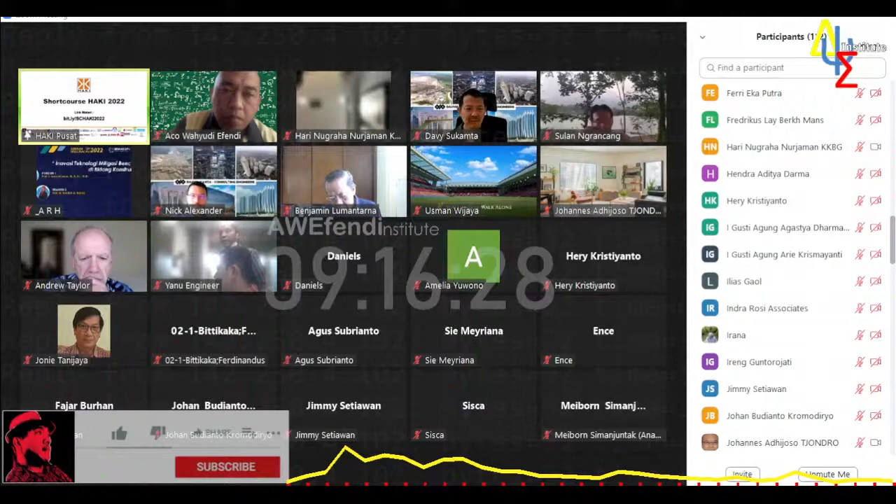Tanah air beta, pusaka abadi nan jaya. Indonesia sejak dulu kala selalu dipuja-puja bangsa. Di sana tempat lahir beta, dibuai dibesarkan bunda, tempat berlindung di hari tua sampai akhir menutup mata.

Okay, so thank you very much for inviting me. As I said, I will be speaking—let me back up. I will be speaking for a little over an hour, maybe 90 minutes, and then we'll have time for questions, so I will attempt to answer as many questions as I can.

The two main topics that I will talk about are the changes, as I mentioned, between ACI 2014 and ACI 2019. And then I'll be describing some of the changes, not all of them, because we're still working on it, for the 2025 building code.

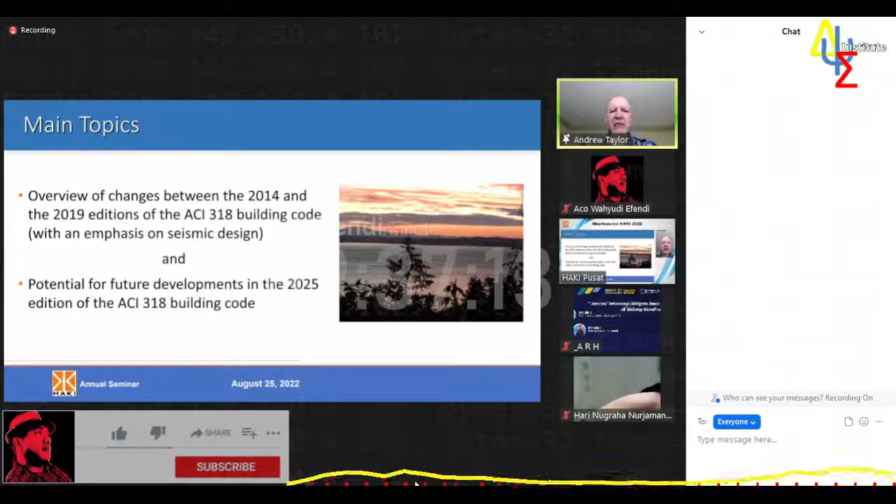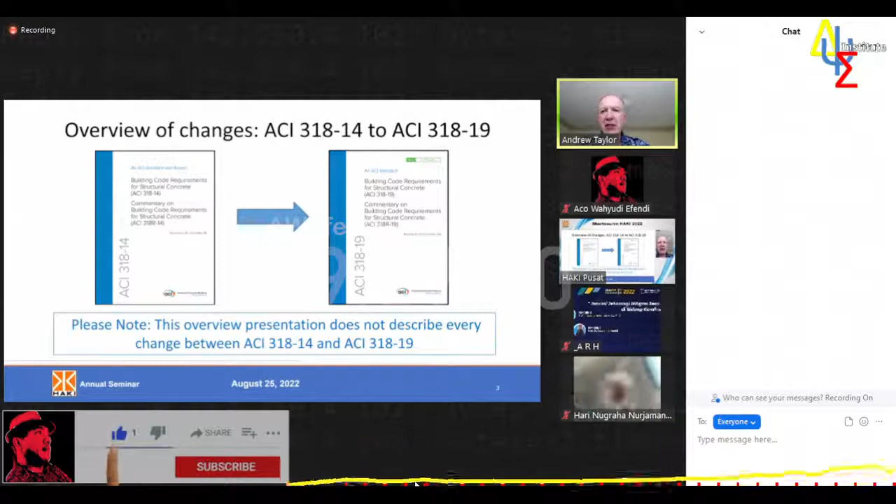I want to point out that in this presentation, there are a number of changes to ACI 318-14 to 19, but in this presentation, I will only cover the most important ones, the major ones, and I will let you know what these most important changes are. Normally, when I present about the changes between ACI 318-14 and 19, it is about a 6-hour presentation, so I've condensed that, and I'm going to cover the most important points today.

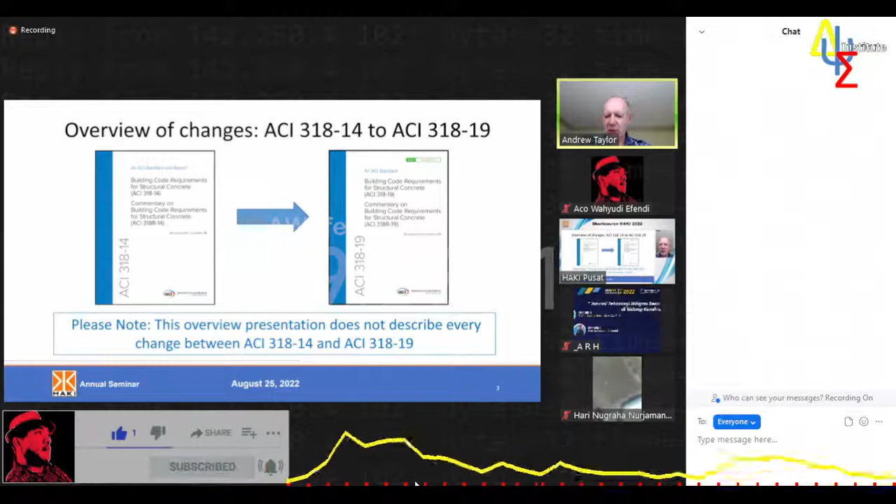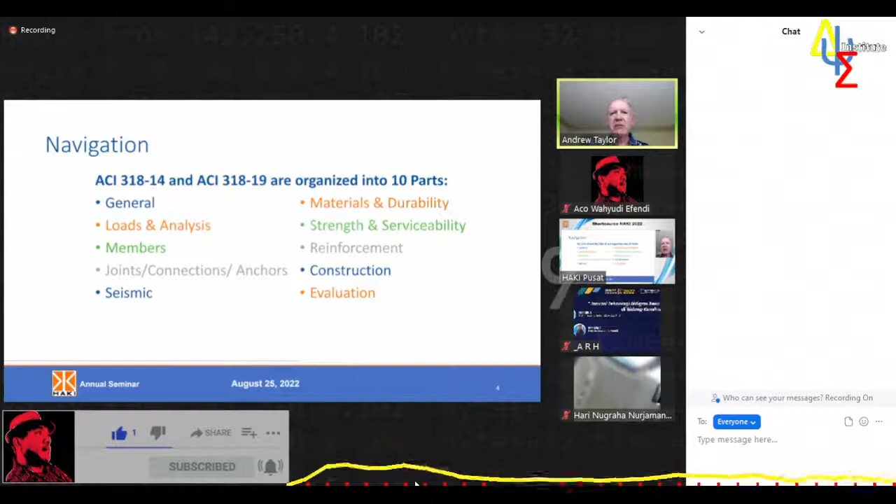I want to point out that since 2014, the ACI code has been organized into 10 sections, and you see them listed here. The first is general, which contains information on how the code is to be used and interpreted, and so on. Then loads and analysis, member strengths, joints and connections, seismic materials appears in a section, materials and durability, strength and serviceability, reinforcement, details, construction-related provisions, and evaluation of existing structures. This is just to give you a very large overview of how the code is organized.

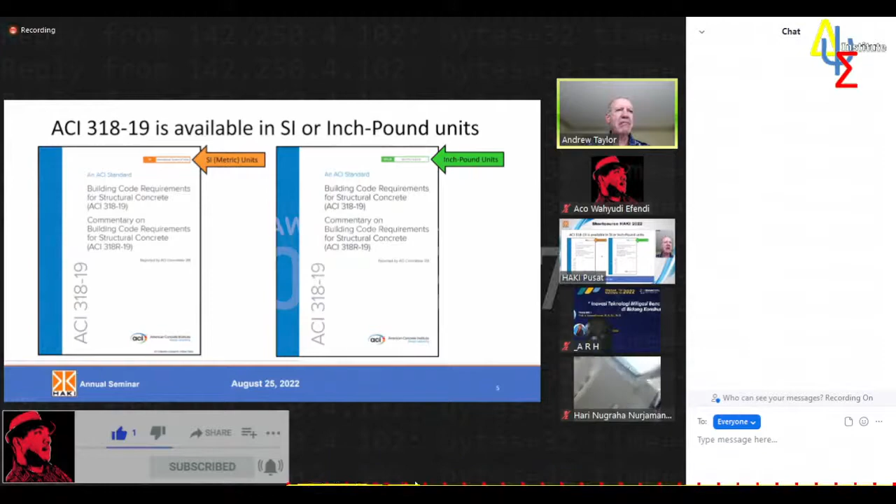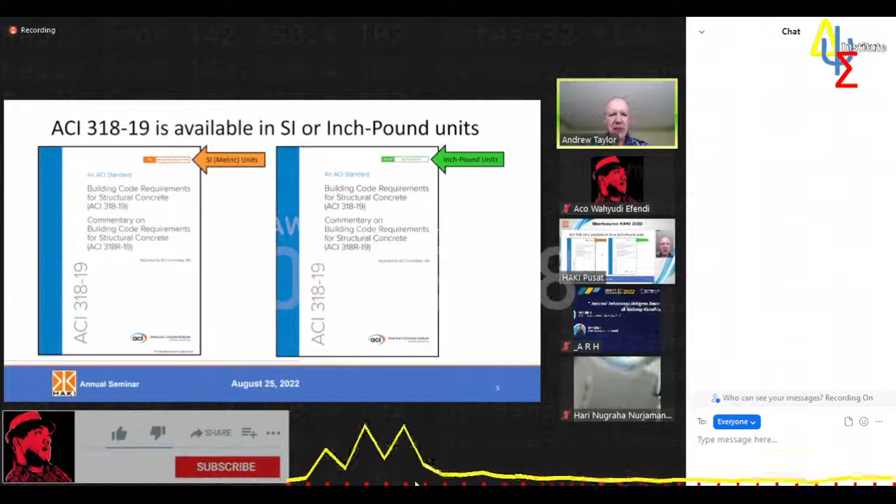Now, I want to point out also that there are several editions of the code available, including one in SI units, which is the one that I'm assuming that you would be using. The one on the right is the inch-pound units version, the one that I use most. You can see the difference shown in the upper right corner, inch-pound versus SI. There are also editions of the code in Spanish, Chinese, and I believe one or two other languages. But most importantly, the slides that I'm showing you today are mainly listed in the American units or inch-pound units.

I've attempted to translate those units into SI units at key points within this presentation. For instance, I've converted kilopounds per square inch, or KSI, into megapascals, I've converted forces into newtons, and so on. Hopefully you'll be able to follow along in familiar units. I've also listed, for your convenience, the conversion factors if you wish to convert anything from the inch-pound version to the SI version.

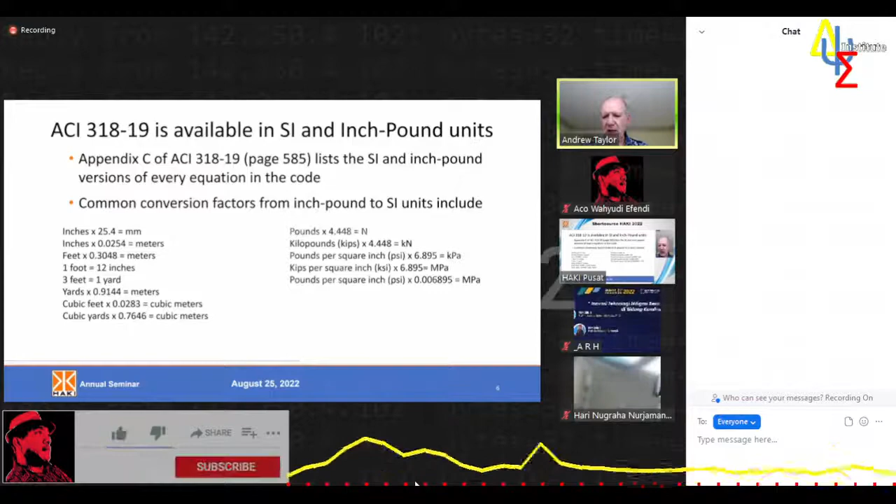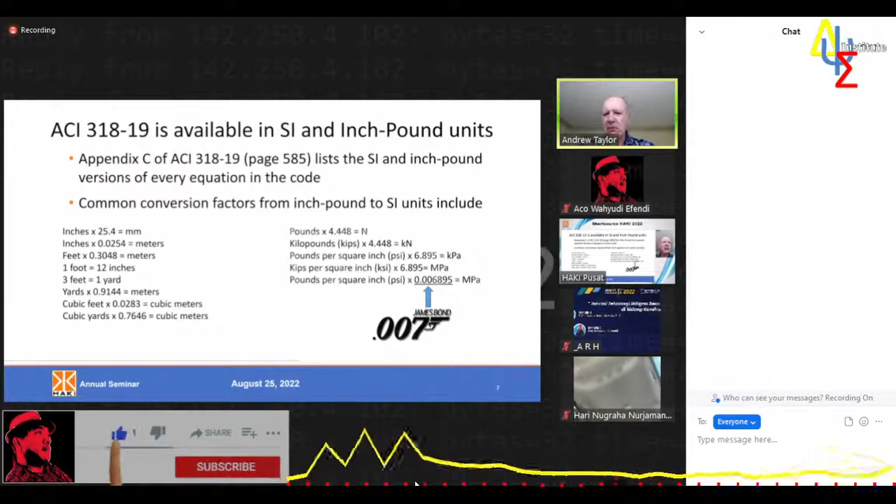One factor I find very interesting is the last one: pounds per square inch times 0.006895 equals megapascals. I wanted to note that's close to the famous number associated with secret agent James Bond, 0.007. So remember that number if you're ever converting from pounds per square inch to megapascals.

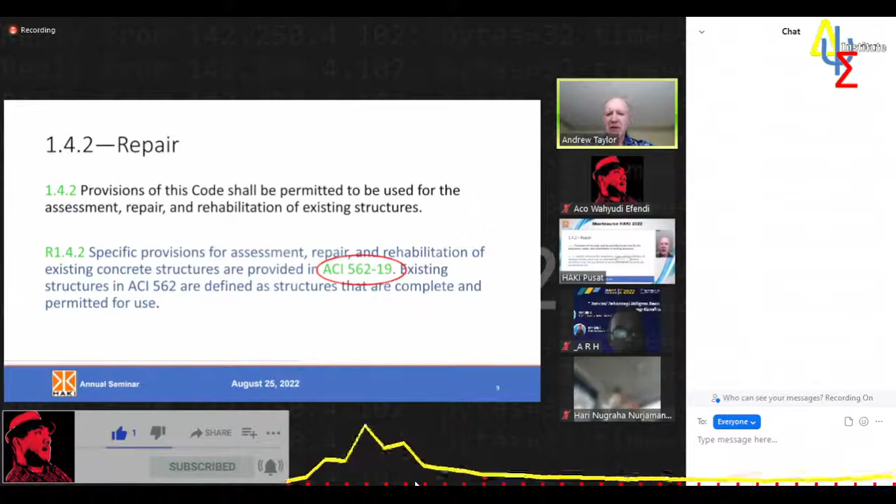All right, let's get started on the actual contents of the code. When it comes to repairing existing buildings, those that have been damaged or deteriorated, the code refers to the document ACI 562, which is a repair and rehabilitation code. It's a very comprehensive and helpful code, so if you're encountering a situation where you need to repair an existing structure, please refer to it. But we also say in ACI 318 that the provisions for new construction or new design can be used when repairing an existing structure. So if you're using ACI 562, you'll also refer back to ACI 318, which is what we're talking about today.

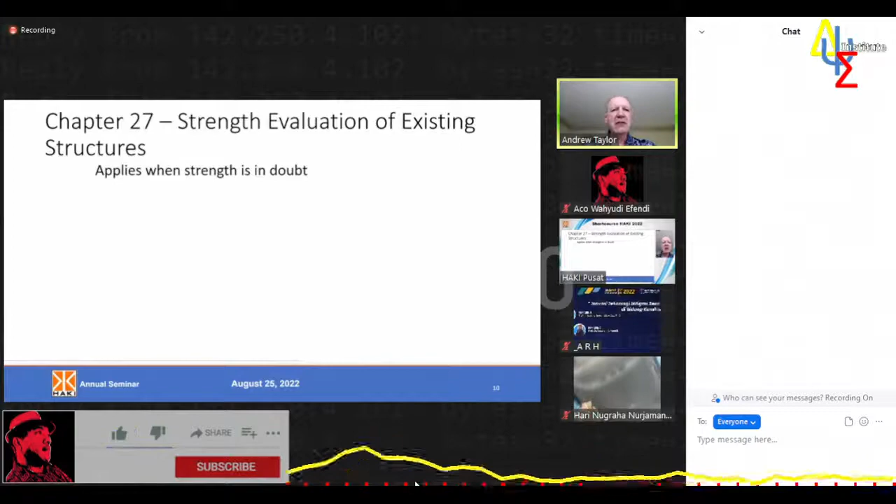So I'll skip way to the end of the code. The very last chapter is chapter 27, and its topic is the strength evaluation of existing structures. This applies when a structure is completed but hasn't been occupied yet. However, there may be some question about the strength of the structure, and this often happens if, for instance, a concrete strength test comes in too low. So it may be necessary in some cases to evaluate the strength of an existing structure in order to certify it for occupancy.

What is generally well understood by engineers is to look at the structure in question, if perhaps the concrete strength is lower than expected, and perform calculations to evaluate that structure. I think many of us understand how to do that and to see if the lower strength is perhaps acceptable. But what is not well understood generally is the procedure for actually performing a load test on the structure in the field. This load can be applied in a number of different ways: with heavy blocks, with tanks of water, with hydraulic jacks.

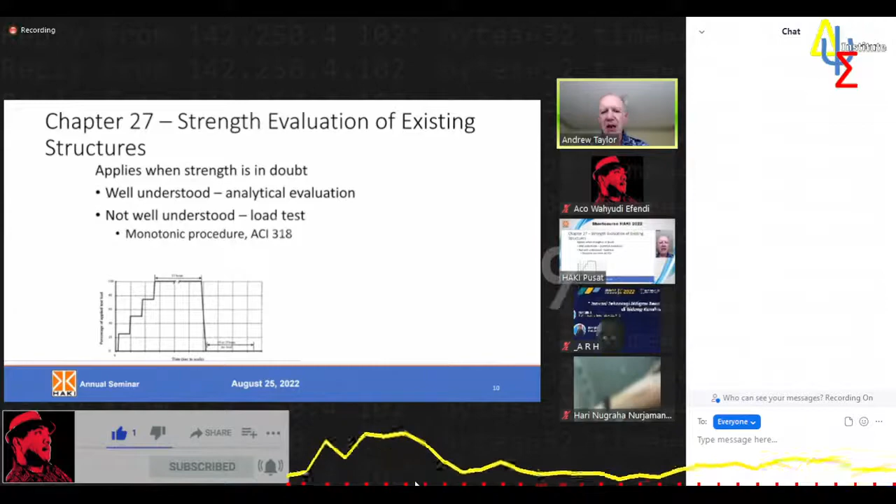There are two test procedures described in chapter 27. If you're encountering a situation where you need to actually test the strength of a structure, one procedure is called the monotonic test. It takes a long time because, as you can see in the lower graph, you have to apply the load and hold it for 24 hours, a full day, remove the load, and then evaluate the deflection after another 24 hours. So it takes at least 2 days to perform this test.

There's an alternative procedure called the cyclic procedure, presented in the document ACI 437.2. As you can see, the total time for one test is 120 minutes, or 2 hours, meaning this test can be performed much more quickly, and perhaps several tests can be performed at different locations in a structure if necessary. It's a cyclic load test where the load is increased and then decreased, increased again, and so on. I just want to make you aware of those testing procedures available in 318 and in ACI 437.

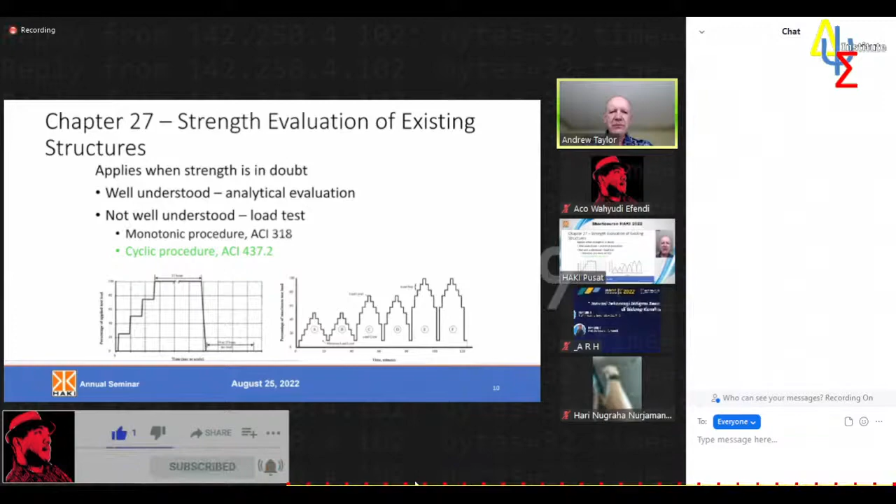All right, now we're going to go back to some of the more fundamental aspects of design that are covered in ACI 318. I want to point out something which is actually not new in the code, but it's very important, so I want to bring it up.

In previous years, previous editions of the ACI code, let's say ACI 318-08, the loads in that code were based on a US document called ASCE 7-05. In that code, the wind loads specified in ASCE 7-05 are not factored, meaning when one is creating the load combinations for design, you have to multiply the wind load from ASCE 7 by 1.6. So it's a factored load in that case.

Now, what has happened since then—and again, this is not new—is that in the last 3 editions of the ASCE 7 load document, that document has changed from service level loads to strength level loads. And the load factor used in load combinations is now 1.0.

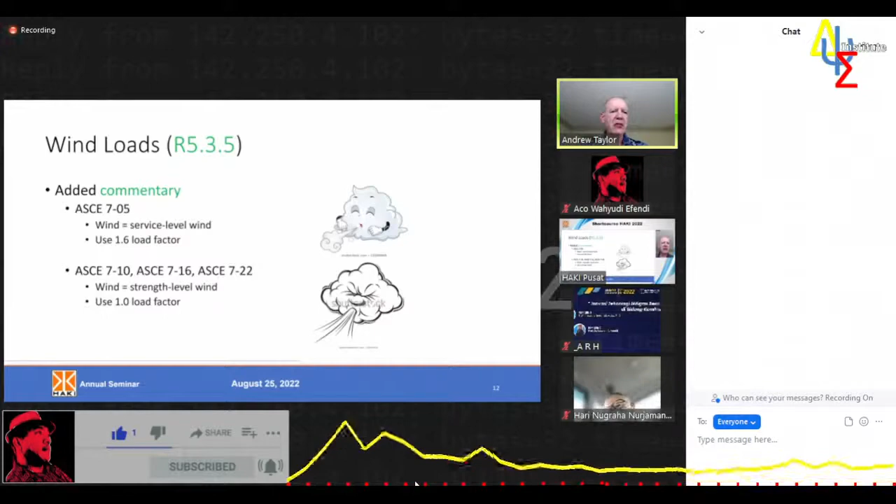So the wind loads as presented in ASCE 7 now are already factored. This is a very important distinction to be made aware of for wind loading, because the difference is a factor of 60% for wind loads. So if you follow current practice and use factored loads in your design, whether they're from ASCE 7 or some other document, as long as they are considered strength level wind loads, then the load combinations in ACI 318 are correct. Just a very important point about wind loading.

Another aspect of concrete design that I'm involved with quite a lot is the vibration of floors, either for sensitive occupancies like medical MRI machines or electron microscopes, or for human comfort, such as in apartment buildings, offices, and so on, where occasionally floor vibrations can be a problem.

Generally, concrete floors perform quite well from a vibration standpoint, and typically we don't have issues with them. However, there are cases, for instance long spans, very high precision machinery, or where there's a rhythmic loading, such as an exercise studio or vibrating machinery, and sometimes precast concrete elements can exhibit vibration that is not acceptable in a particular situation. So in the commentary to ACI 318, there are references for procedures and methods that can be used to evaluate floor vibrations. I want to point that out because occasionally that is something that just about every consulting engineer needs to deal with.

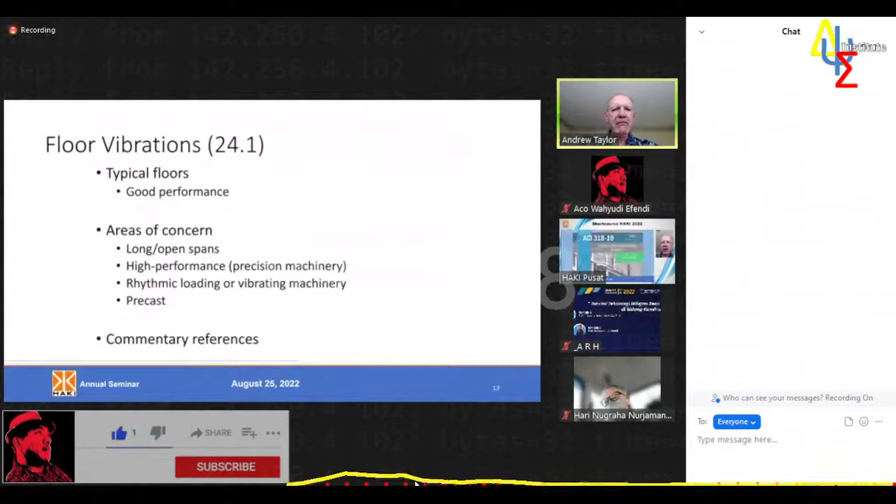All right, now we're going to talk about types of members, meaning slabs, beams, walls, and so on. The first type of member we're going to talk about is one-way slabs. These are slabs that flex in one direction rather than in two directions, and of course they're the simplest type of slab.

With this type of slab, the one-way bending slab, we are concerned with all structural systems, but in particular this one, about the potential for collapse under extreme loads that we don't even consider in our design. What we would like to do is preserve the structural integrity of these elements, these slabs in particular, so that they will remain in place. They may be severely damaged, but they will have a good chance of not collapsing. Because as we know, collapse of one element in a structure causes loads on adjacent elements. So we want to preserve this structure in its original configuration, even though it may be severely damaged.

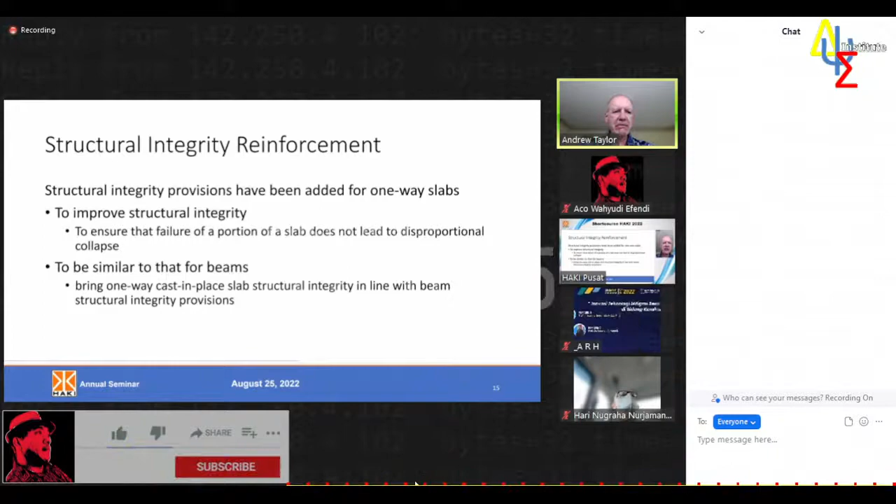So there are new provisions in the ACI 318 code to provide very minimal, inexpensive, continuous reinforcement in one-way slabs, to provide a high degree of confidence that they will remain in place if they're subjected to some very extreme loading that wasn't anticipated in the original design loads. So that's what's new about one-way slabs. Not much has changed, except that there's those new provisions for integrity reinforcement.

Regarding two-way slabs, you may be interested to see that two of the methods that have been in the code for a very long time, maybe 50 to 80 years, the direct design method and the equivalent frame method from 318.14, have been removed. Now this is not because there's anything wrong with those methods. Those methods are completely valid. It's just that they are not used very often. Most of the time they're used primarily for preliminary sizing, but not for final design. And we looked at those, and we are trying to save paper when we print the code.

So what we did was we took those methods out, but we left references in the code that said, for instance in section 8.2.1, the direct design method or the equivalent frame method, which have been removed, are valid. You just have to refer back to ACI 318.14 for the rules about how to use them. They aren't eliminated, they're just not printed in the current edition of the code, because we found that in practice they actually weren't being used very often, but there's nothing wrong with those. That same provision appears in section 6.2.4.1. So those methods are still available.

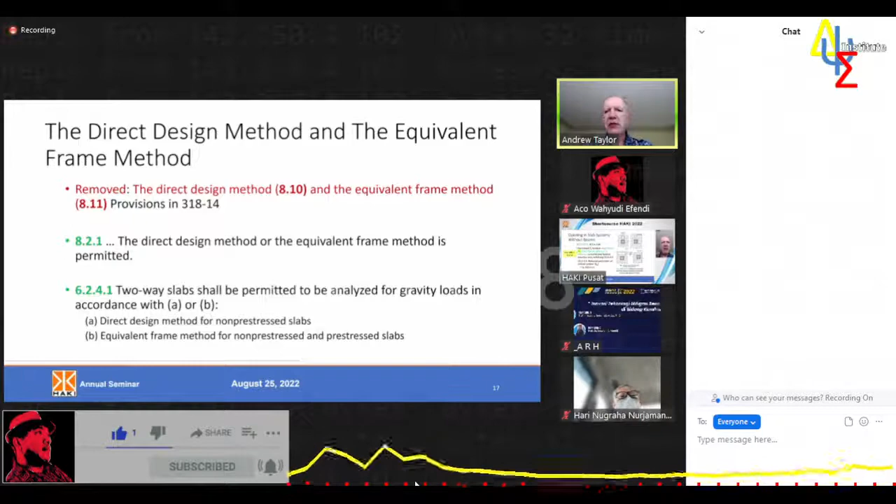Here's a very important one, especially if you're doing commercial design of multi-story buildings. We all know that the mechanical engineers want to put holes at the worst possible locations in the structures that we design.

That is right next to columns. They want to put holes through the slabs where pipes and conduits come down the columns. There are rules in ACI 318 about how to evaluate the punching shear strength of a slab intersecting a column. A very common form of construction is flat slabs without any drop panels or shear caps, just a flat slab intersecting a column.

A big change is that it was determined that previously in 318-14, the distance from the column that an opening may be located without affecting the punching shear strength of the column was 10 times H, where H is the thickness of the slab. That created more situations where it was harder to design for openings like those shown on the right.

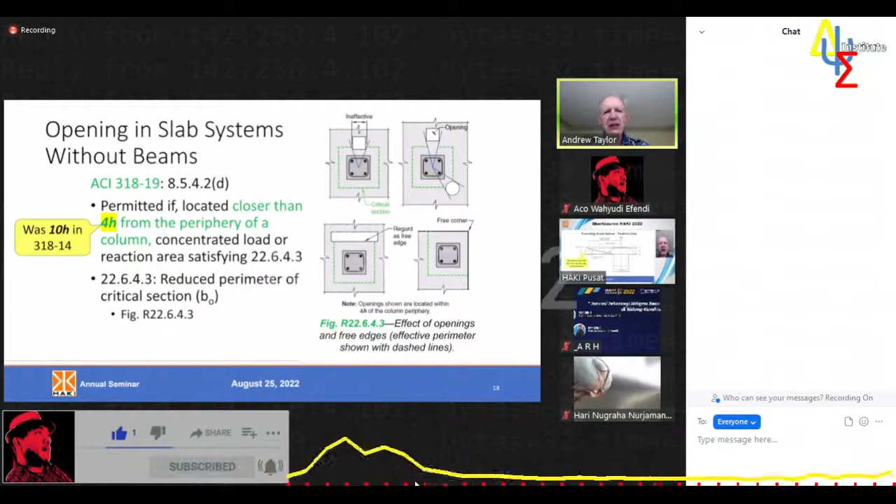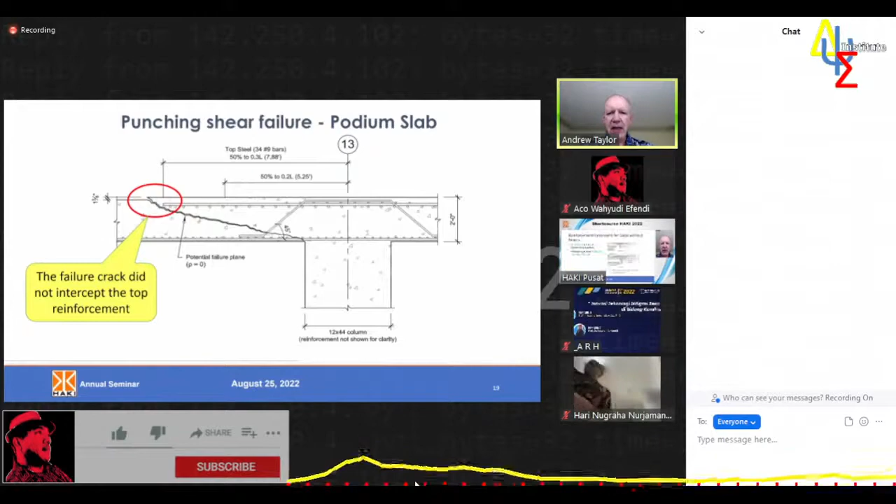D is the distance from the surface to the centroid of the tension reinforcement. So this is a new rule. If you're dealing with a very thick slab and you're concerned about punching shear, make sure that you evaluate the extension of those bars and that they meet the 5D extension rule.

Notice one thing that's very important: that extension is measured from the face of the column, not from the center line of the column. It's easy for the steel reinforcement supplier to mistakenly provide bars where the length or extension is measured from the center of the column, but it's from the face of the column that that extension is required.

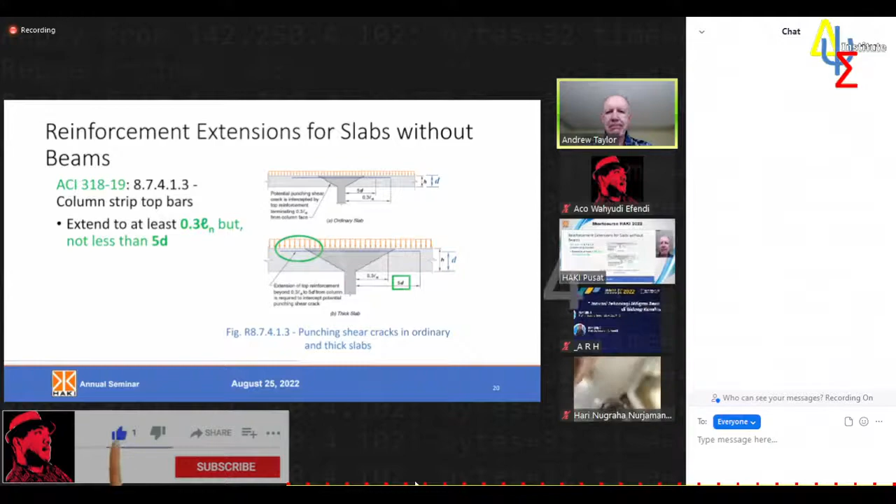Okay, now post-tensioning. This is a method that is widely used, particularly in the Western United States, not as much in the Eastern US. I'm sure that in your career you will encounter it - you may commonly work with it, or it may be less common in the kind of work you do. But there are a few changes here.

There is a new requirement for the spacing of non-pre-stressed reinforcement - the normal deformed bars in the slab. That spacing, not the spacing of the post-tensioning tendon but of the normal deformed reinforcement, has been reduced and is now the same as it is for non-pre-stressed or normally reinforced slabs. So things have been simplified a bit: the maximum spacing of deformed bars in pre-stressed slabs is now the same as for non-pre-stressed slabs.

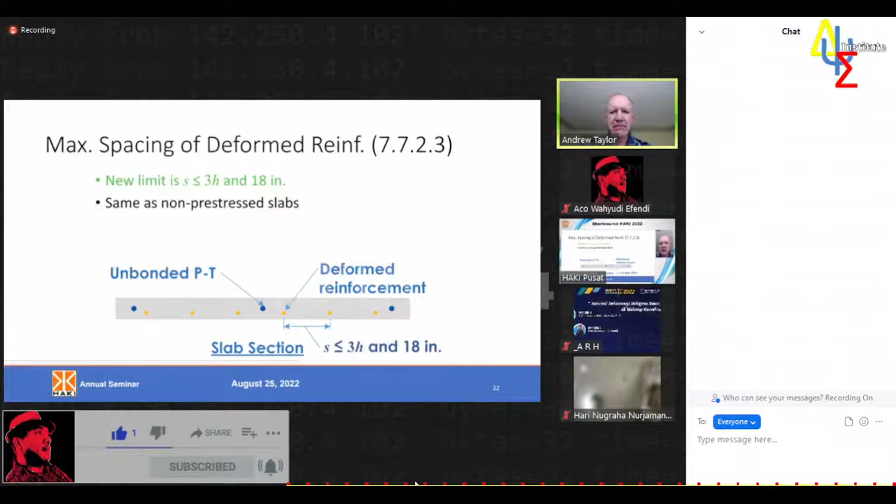Why are we requiring these bars? It's been found that the slab can split under the pressure or force of the post-tensioning tendons if there's insufficient reinforcement to inhibit this splitting and bursting of the edge of the slab. So these are new rules - if you're involved with this kind of construction, I would recommend that you review the rules for these backup bars, anchor bars, and hairpin bars.

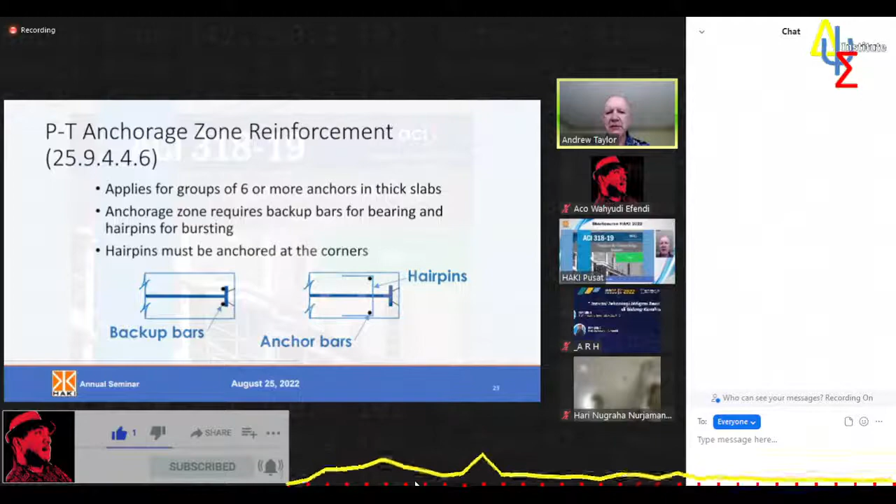Okay, now walls. What I'll be talking about here are not seismic shear walls, but non-seismic walls.

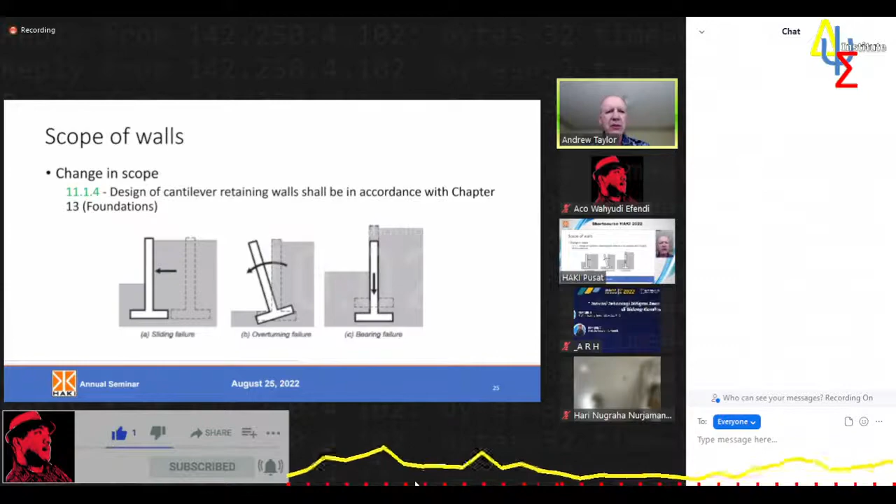There are a few changes. One of them is that cantilever retaining walls, with their illustrations of loads on cantilevered earth retaining walls, are now moved into chapter 13, or designed according to chapter 13. You might wonder why. They're walls, they were in the wall chapter, chapter 11, and now they've been referred to chapter 13, foundations.

What we found is that in 318-14, there was some confusion about the reinforcement of retaining walls. Specifically, there were rules about a portion of the reinforcement that had to be on one face of the wall and the portion that had to be on the other. They weren't very clear, they weren't very well understood. The definition of interior face and exterior face was not very clear, and we found there really was not a strong technical basis for the 1/2, 2/3 rule.

So now the rule is that there are 2 layers of bars near each face. It doesn't specify what the proportions are, as long as the calculations work for strength. There's one exception where that's not required: for walls greater than 10 inches thick, about 250 millimeters, for single-story basement walls. Generally these are found, at least in the US, in residences, one story below ground. Those do not require 2 layers of reinforcement, but all other walls greater than 250 millimeters require 2 layers of reinforcement.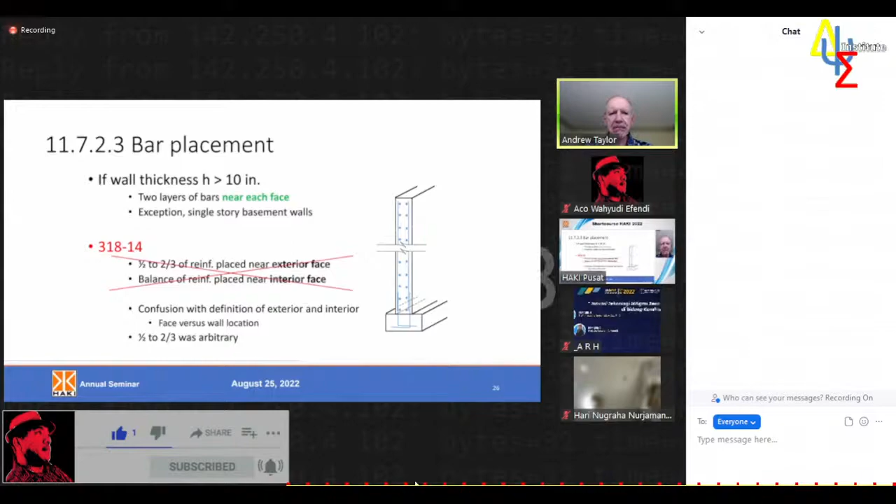Now let's talk about foundations. There are some really significant changes about foundations that I want to go over. As I mentioned, we moved the cantilever retaining wall provisions, or design rules, into the foundations chapter, and there have been many changes in the sections on the design of deep foundations. So what are deep foundations? Those are piles, drilled piers, drilled shafts, cased shafts, both cast-in-place and driven piles. They're all the types of foundations used in soft soil conditions. I'll describe why those have changed in a moment.

I also want to note that there have been small changes in the minimum concrete strength required for different types of foundations, and also a change in the concrete cover requirement, meaning the thickness of concrete covering the reinforcement.

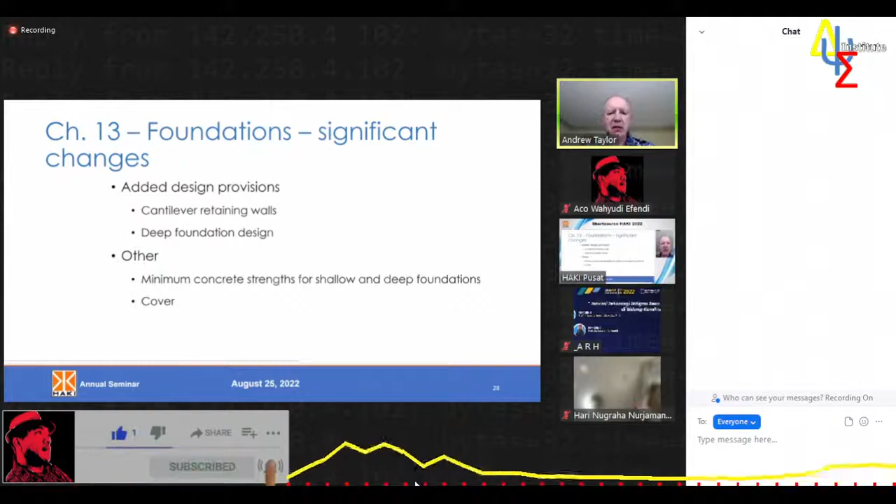So first of all, cantilever retaining walls. In 2014, the code described cantilever retaining walls as walls, and that they should be designed as walls. In 2019, we had a philosophical change so that these cantilever retaining walls are actually designed according to the rules for a concrete slab. We believe they perform better, are more economical, and it makes more sense to design them according to the rules for concrete slabs rather than walls.

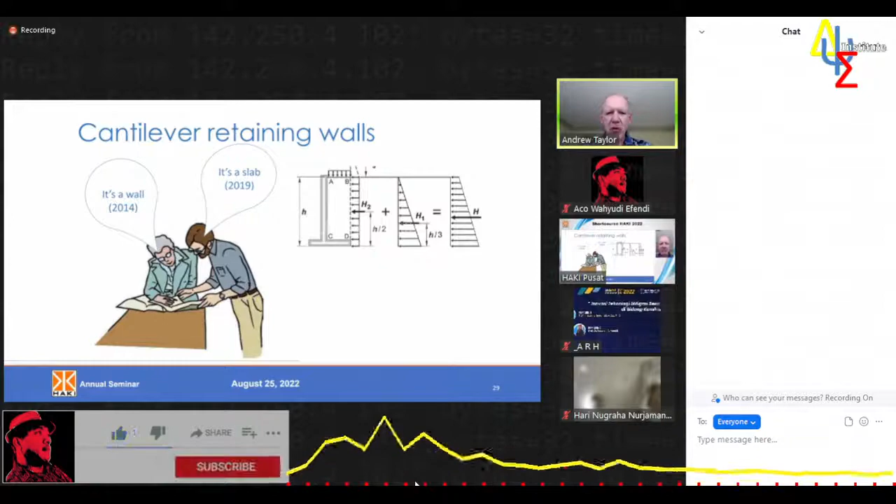I won't go into all the details, but if you look on this chart, you'll see that if we design cantilever retaining walls as a slab, as a one-way slab, then the rules for design get much simpler. In general, that results in a more economical design because it's a little more reinforcement, but it's the same in both the vertical and horizontal directions, so it's much easier to put into place. It also avoids mistakes in the field of having the wrong reinforcement placed vertically versus horizontally; they're the same. This chart outlines the differences between 318-14 and 19, and if you're interested you can refer to the sections shown there. I think you'll find it's an improvement over the last edition of the code.

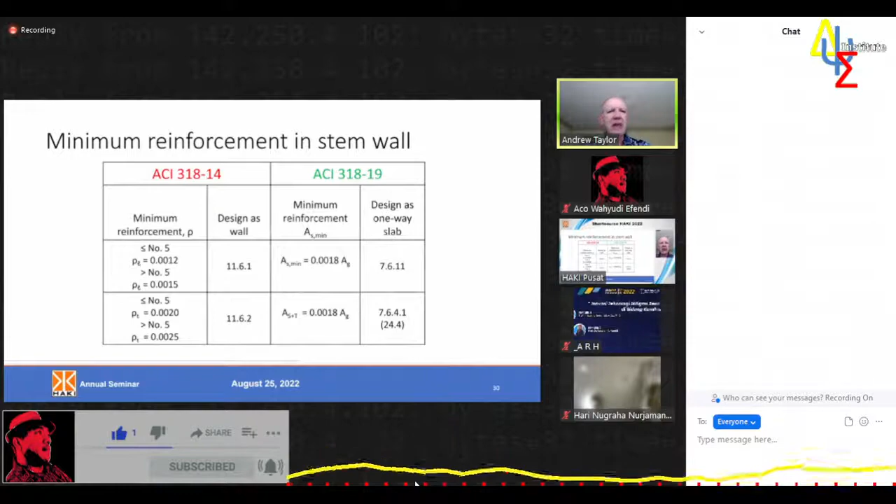Now, regarding deep foundations, I said I would explain why there have been changes in all these different types of foundation provisions. The ACI code mainly addresses deep foundation design for earthquake-resistant structures.

In the US, earthquake-resistant structures are designed according to a seismic design category, SDC, with category A being virtually no earthquake considerations for design, and categories D, E, and F being the most severe earthquake conditions for design.

ACI 318 addresses deep foundation design for seismic conditions in the higher seismic zones, design categories C, D, E, and F. It's a subset of the overall requirements for designing deep foundations, but a very important set of conditions.

Now, the situation that existed and still exists to some extent in the US is that there are rules for designing deep foundations in the ASCE 7 code, which is mainly a code about loads. There are different and sometimes conflicting rules in the International Building Code, which is the main governing building code in the US. And there are other, sometimes different and sometimes conflicting or inconsistent rules in ACI 318.

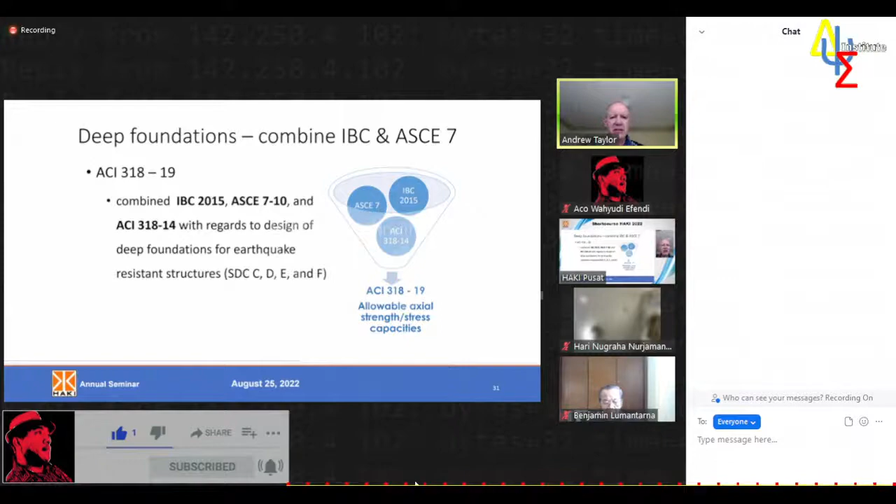Okay, anchorage to concrete is everyone's favorite subject. When we reorganized the ACI code in 2014, it was a major reorganization.

We reorganized all of the chapters except for the chapter on anchorage to concrete, which is chapter 17. So we decided to leave that alone because there had been some major changes in the previous edition, and we didn't want to go and change it again. But when it came to the 2019 edition, we worked on reorganizing chapter 17 so that it looked similar to other chapters that had been reorganized in 2014. So it looks different. The provisions are generally the same.

There haven't been major changes in the anchorage to concrete provisions, but we did add two more types of anchors, which I think are very interesting. One of those is screw anchors. These are anchors where you drill a dry hole and then install the anchor, which has steel threads that cut into the concrete. You're probably familiar with these, but this is what is meant by screw anchors. They're a very useful kind of anchor, fairly easy to install. I like them a lot. They may not work as well in corrosive conditions, but for protected conditions, they're nice.

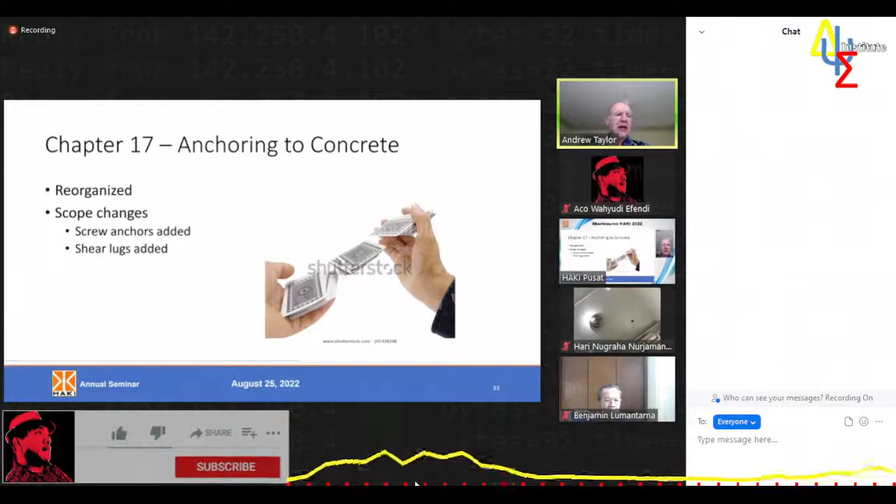And then we added something on shear lugs. So what are shear lugs? On the left here, you see a screw anchor, post-installed. A hole is drilled, and it's inserted with an impact driving wrench. Shear lugs are the steel projections beneath base plates that project into the concrete foundation and provide additional shear capacity beyond the shear V there, beyond what could be provided by the dowel action of the anchor bolts, the four anchor bolts shown in the lower diagram. And in the upper right, you see one of these shear lug configurations.

A lot of testing has been done on shear lugs. We didn't really know what their shear capacity was until fairly recently, at least not reliably enough to predict that. So now there are rules in ACI 318 about how to design shear lugs. We've gained more confidence in how to design and what the shear capacity of column base plates with shear lugs are.

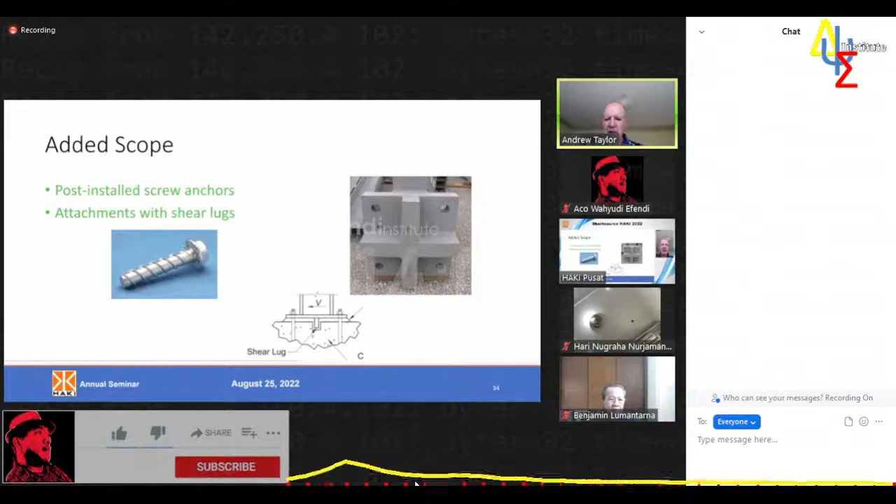Okay, now seismic, a very important topic. I have been involved in seismic design for more than 30 years now, and it never gets old. It's always changing. There's always new things to discover.

In the 318-19 code, we have made some changes in the seismic design provisions. If you would like a complete and very detailed tour of all these seismic updates, I suggest finding two articles in Concrete International, published last year in March and April. S.K. Ghosh and I wrote those together. They cover just about every detailed aspect of the changes to seismic design that occurred in the 2019 code. I invite you to look at those, but I'm going to point out some of the changes that are most important in this presentation.

Perhaps one of the biggest and most important changes is that higher strength reinforcement is now permitted in seismic design. Previously, grade 60 reinforcement, which is 420 megapascal reinforcement, was permitted for ductile seismic design, for flexural elements, and for shear. Now, 550 megapascal and even 690 megapascal reinforcement is permitted under certain conditions in seismic systems.

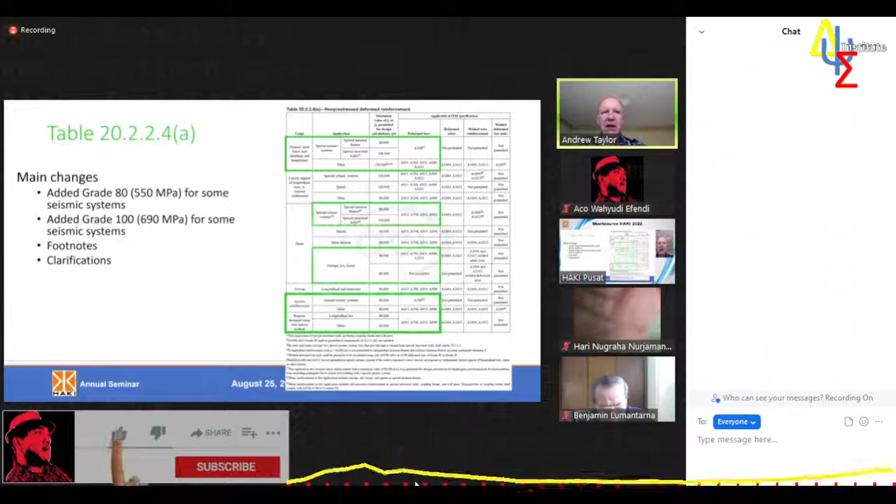Now let's talk about seismic design of some specific earthquake force resisting systems. A lot of the changes have to do with the availability now of higher strength reinforcement for design. And what I've done on these next few slides is shown, in the green box, where the new availability of steel grades is permitting you to use a different type of bar.

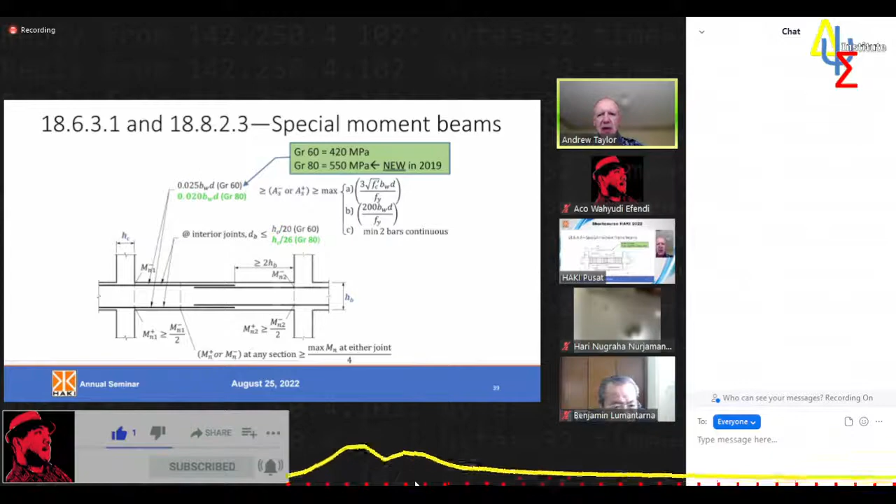So new in 2019 is using grade 80, or 550 megapascal reinforcement, in this case for flexural reinforcement in special moment frame beams. Anything in green on these slides is new in 2019. I won't go into the detail here, but as you can see in some of these other illustrations, for instance, the shear reinforcement now can be a higher grade, but also notice that the spacing of the reinforcement is reduced for the shear reinforcement to a smaller spacing. There's a couple technical reasons for that, but it mainly has to do with the tendency of bars, especially in seismic applications, to buckle laterally between the points of support, which in this case are the shear reinforcement, the hoops, in special moment frame beams.

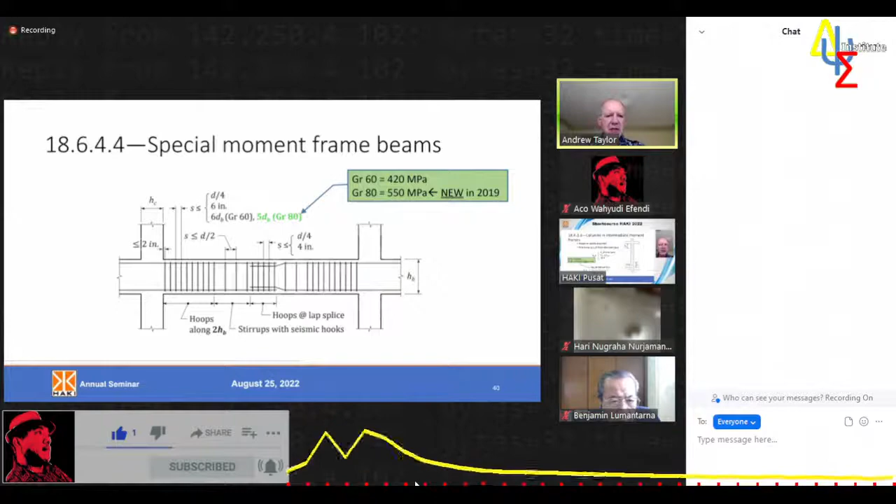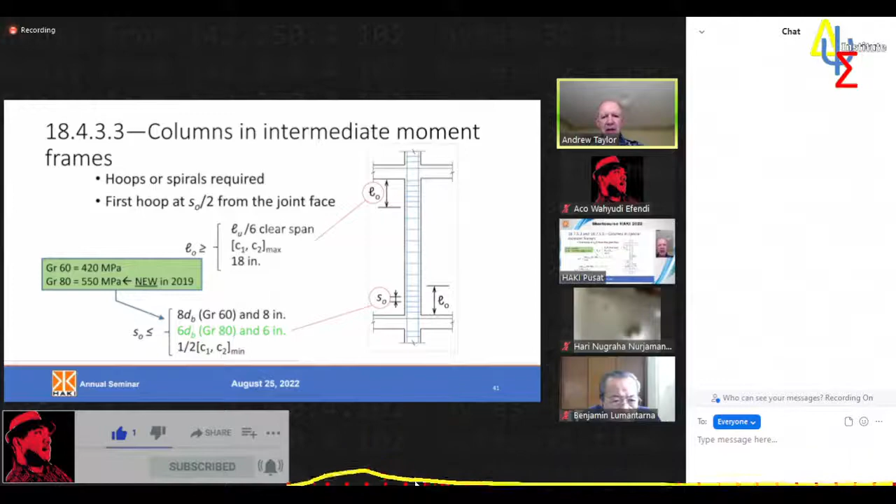So just be aware, if you're using the higher grade reinforcement in certain applications, sometimes the spacing has changed, decreased slightly. We see here again that there's a spacing change if you're using 550 megapascal hoops in intermediate moment frames in this example. If we look then at columns in special moment frames, again, you can use the higher grade reinforcement, but the spacing has decreased slightly for the higher grade.

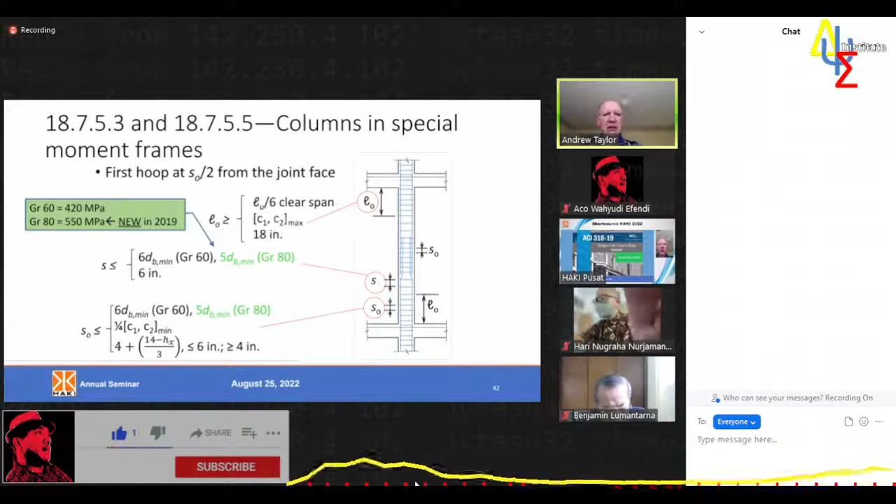And then we get to special structural walls. Now, this is probably where the most significant changes have occurred, and I'll try to cover the main points so that you understand what has changed in 2019 with special structural concrete shear walls for seismic.

Here is a brief summary of the changes in shear walls, special structural walls, and I'll describe each of these briefly in subsequent slides. The cutoff or stopping of longitudinal bars - the rules have changed, I think, for the better. Reinforcement ratios at the ends of the walls have been changed somewhat, though it probably won't affect too many buildings in practice. The shear demand is a very significant change that I'll be spending some time on - the shear load required to be resisted by the walls has changed. There's a new drift capacity check, which again will probably not influence the design of walls very much. There are very significant changes in the detailing requirements, the hoops and cross ties in the special boundary elements at the ends of special walls. And there is a new section on ductile coupled walls. So I'll go through all of these briefly in the following slides.

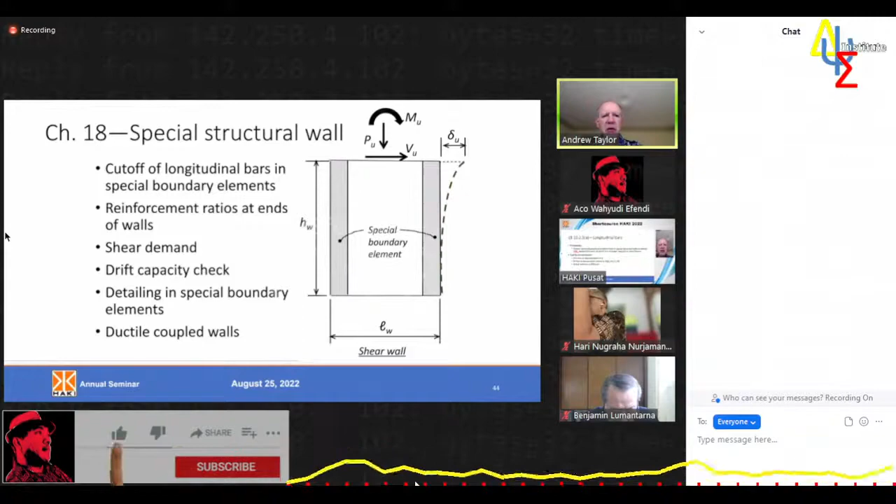So previously in 2014, if you had a vertical bar in a shear wall, and you got to a certain height in the building where you no longer needed that bar because the flexural demands have decreased as you go higher, and you want to stop that bar, under the old rules you had to extend that bar 0.8 times the horizontal length of the wall. So if you had, for example, a 10-meter long wall, which is fairly common in the U.S. on the West Coast, and you needed to stop a bar, you couldn't stop it where you no longer needed it - you needed to extend it 8 meters beyond that point. So 8 meters is about 2 stories typically. So what was required was to extend these bars 2 stories above where they're needed, which in some cases is really excessive, and there wasn't a really solid technical reason to do that. So we had a lot of debate about that provision.

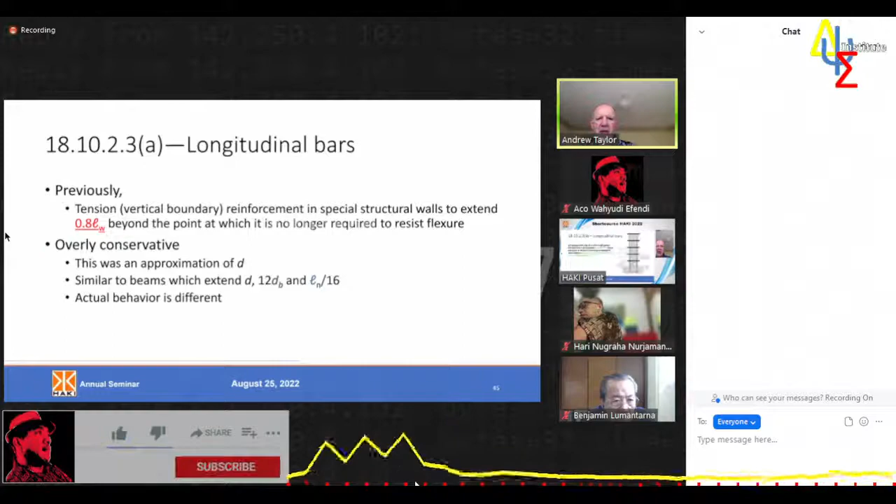And the new rule is illustrated here. Once you find the point at which a bar is no longer needed, you need to extend it at least 12 feet, or a little less than 4 meters - about 3.7 meters - above the point that it's last needed, which is much easier to build. However, if that 3.7 meter extension went above the next floor, then you only need to go L sub D, one tension development length above the next floor, so it could be significantly shorter than 12 feet. This is a big change from the 0.8 times the length of the wall extension that was required, and it took a lot of debate, discussion, and voting to get this change through.

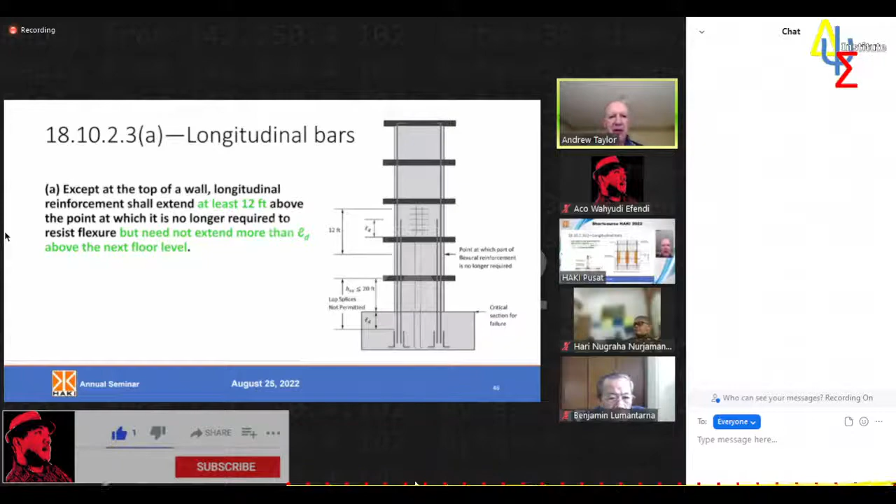Okay, moving on to a different topic about walls. There is a new provision, which I have to say is a little bit controversial, regarding the location of lap splices. Lap splices are where 2 bars are joined by overlapping them. Lap splices are not permitted now in 318-19 in the zones shown in orange on the right. Those zones are at the base of a wall where a plastic hinge, an inelastic hinge, will form, and in the special boundary regions - the heavily reinforced regions near the ends of walls or at the intersections of walls, as shown on the left illustration with a T-shaped wall where the boundary regions are shaded in orange. Within those boundary regions, over a distance from the height of the first story above the base, or one development length of those longitudinal bars below, lap splices are not permitted.

Unfortunately, lap splices at that location are the simplest way to construct those walls. Obviously, you have short bars coming out of the foundation, and then you continue to build the wall above - that's the easiest way to do it. The problem has to do with the inelastic stretching of bars in that region. If only 1 or 2 cracks form right at the top of the foundation as the wall flexes back and forth, all of the strain in those bars will end up concentrated in a very short region, and it could lead to fracture of the bars. So based on research and examination of various studies, the rule was implemented to prohibit lap splices in the orange zones shown here.

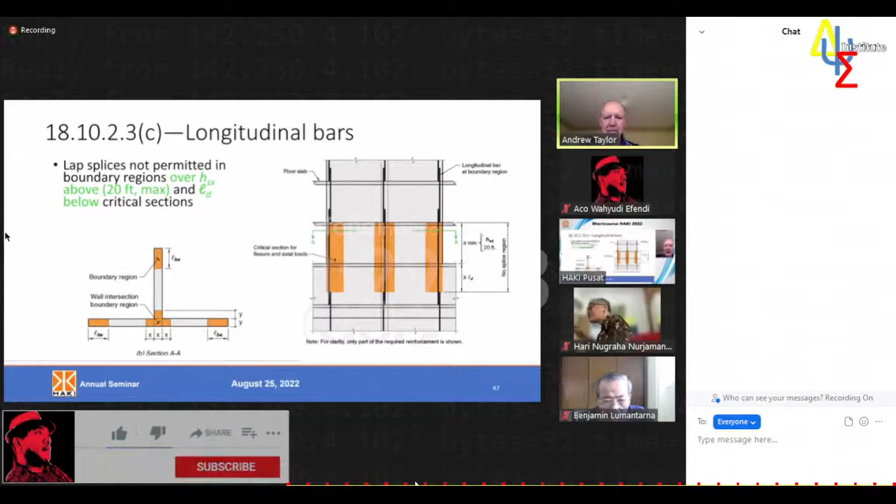Another change, which is a little harder to understand but makes sense, concerns when the longitudinal or vertical flexural reinforcement in a wall is adequate for flexure, but not adequate to create many small horizontal cracks up the height of the wall. This concentrates inelastic strains in just a few locations, which could promote fracture of the bar. This was based on observations from earthquakes in Chile and Christchurch, New Zealand, where only 1 or 2 large cracks formed in some walls, not many small secondary cracks. It's just not a good situation, as illustrated by the analysis results shown on the right.

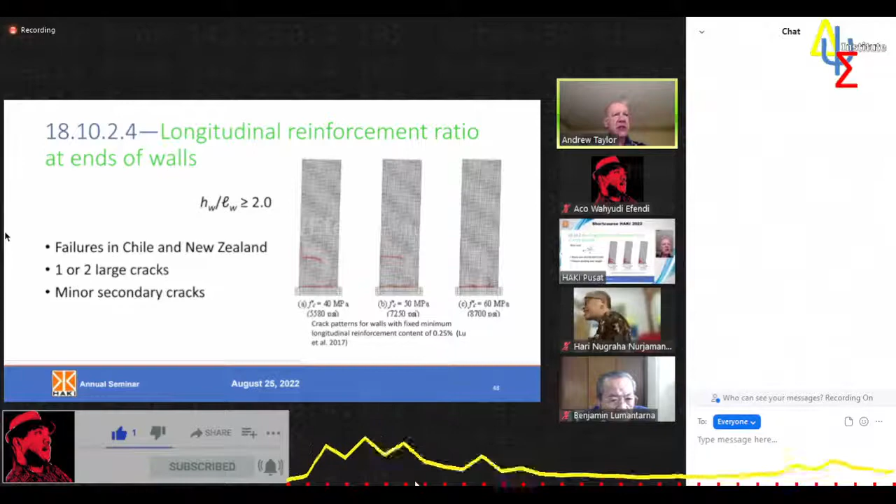So by adding a little more reinforcement in the ends of the walls, we end up with a situation where there are many small horizontal cracks. The inelastic strain in the vertical or longitudinal bars is distributed well over the height of the wall, and there's less possibility of a strain concentration and a fracture.

So immediately you're wondering, how much more reinforcement do I need to put in the ends of the walls? There's almost no room in there as it is under the current ACI provisions. Well, this new ratio is 6 times the square root of f'c over fy. I think it's actually different for SI units. This is in inch-pound units. I forgot to mention, in both the SI and inch-pound units of the code, there is a table in Appendix C that shows every equation in the code in both inch-pound units and SI units.

So if you're ever looking at an inch-pound equation and you want to know how to evaluate that expression in SI units, look in Appendix C and you'll find it there. For instance, there's a different equation for this ratio for SI units. In any case, this amount of reinforcement needs to be near the ends of the walls, and that results in this much better behavior as illustrated here.

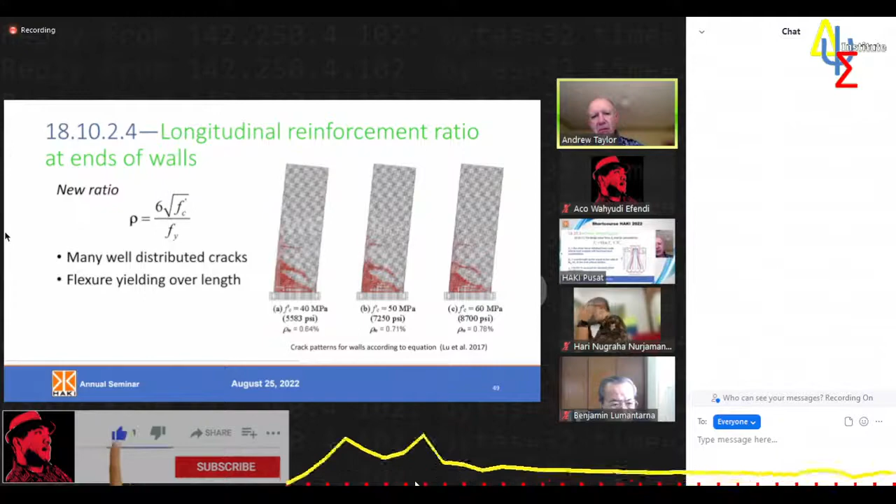All right, another really big change is this shear amplification. Just a little background on this, particularly for tall buildings—by that I mean 15 stories or taller, maybe up to 50 or more stories. In the US, we design those tall buildings according to the code, but we also generally require in the Western US a review by another engineer called peer review, P-E-E-R, to evaluate our analysis methods. I think it's a good system, it provides very consistent levels of design.

But when we do that kind of design, it is now pretty much universal practice to perform a nonlinear time history or response history analysis. So we model the tall structure, subject it to the accelerations of an actual or recorded earthquake, and evaluate the response, particularly the inelastic behavior. We do that for a number of earthquakes, either 7 or 11 different earthquakes for the design of the tall building. What we have always found for the past 15 or 20 years is that the shear in the tall walls is always greater than what you would find if you just applied the ACI 318 code provisions for shorter buildings, and that it is necessary to provide more shear reinforcement in those tall walls than would be determined through a more basic type of analysis.

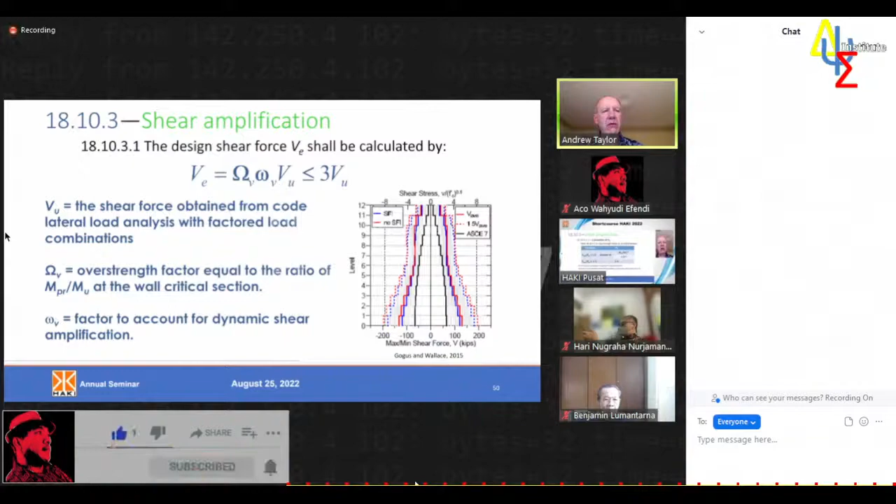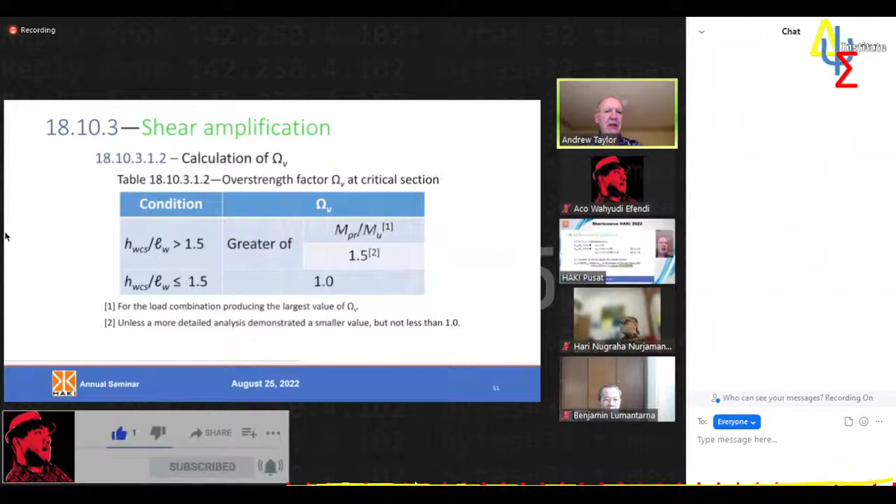And then the small omega sub v is really height dependent, and this n sub s is the number of stories. So we see that for taller buildings, this factor increases. It begins at 1.0 and increases as high as 1.8. But once again, multiplying the two together, the combination does not have to be greater than 3.

I want to point out that this equation is in inch-pound units. This n sub s is greater than or equal to 0.007 h sub WCS, that's the height of the wall above the critical section that you're designing for, and it is in inches. So you need to use the appropriate equation for SI units if you're evaluating that equation.

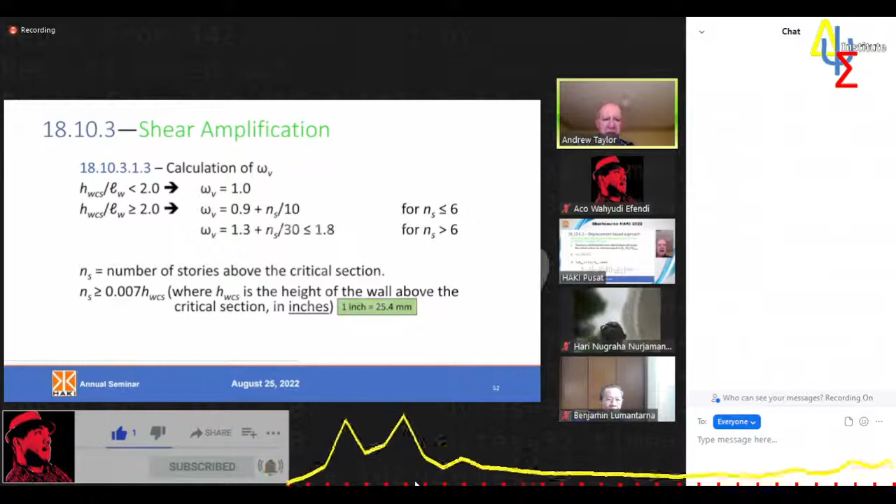This next provision related to walls is presented here as a deformation demand check. So a check that your wall can deform adequately and not exhibit bad behavior when it's called upon to bend in an earthquake.

What it really is, is something that affects the wall thickness. It's really a check to make sure that the wall is thick enough that it doesn't buckle out of plane, that is, buckle sideways when it's subjected to high seismic loads that also cause inelastic action.

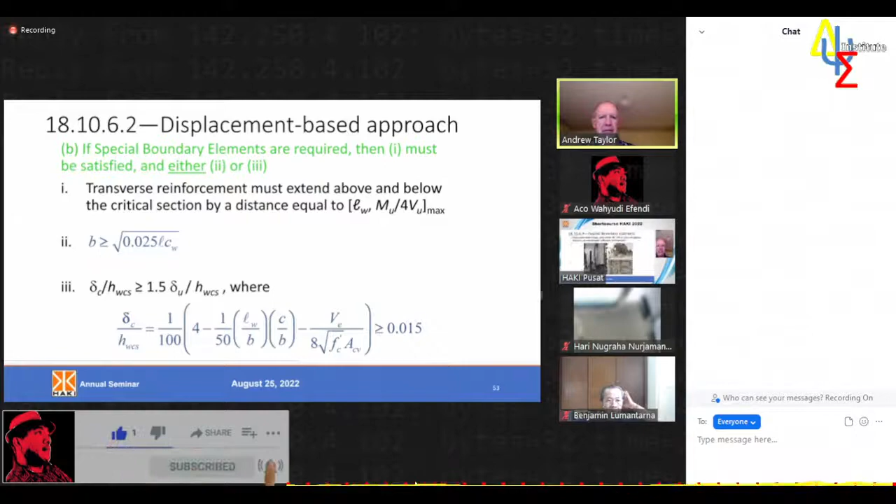Now there have been some other changes in the detailing requirements for special walls, which are important and, again, controversial. There was not uniform agreement in the committees, the seismic subcommittee and the main committee, on whether these requirements were needed or not. But through the consensus process, voting, revision and debate, we developed the detailing provisions I'm about to show you. You will see that they increase the difficulty of construction significantly, and that's why these are even now currently in debate within ACI 318.

We may issue a clarification of these provisions that may make them a little easier to comply with, but I'll show you what they are now as published in ACI 318-19. If and when a clarification comes out, I'm guessing it will be within the next probably 6 months, but I can't be certain. We're working on that, though. So what are these provisions?

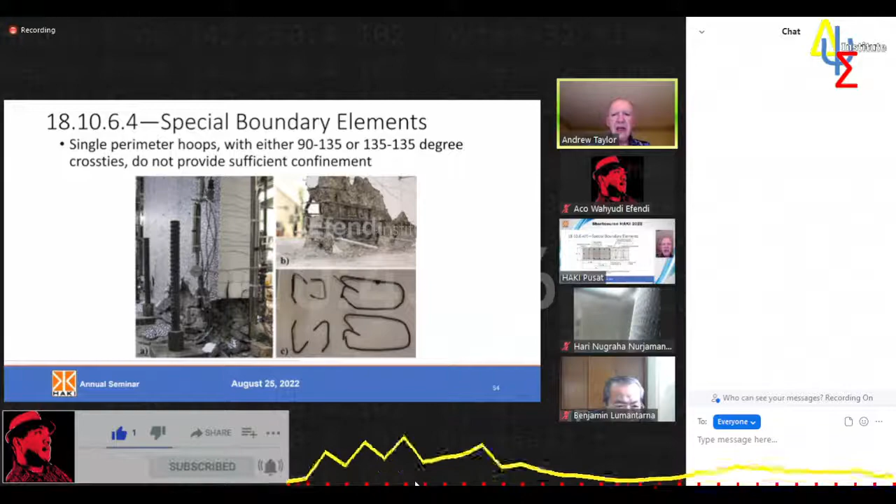This made construction not easy, but possible. Putting 135-degree hooks on both ends of cross ties definitely makes life more difficult for a contractor. I won't comment any further on that, other than to say we are evaluating these requirements now. It's very difficult to build this way.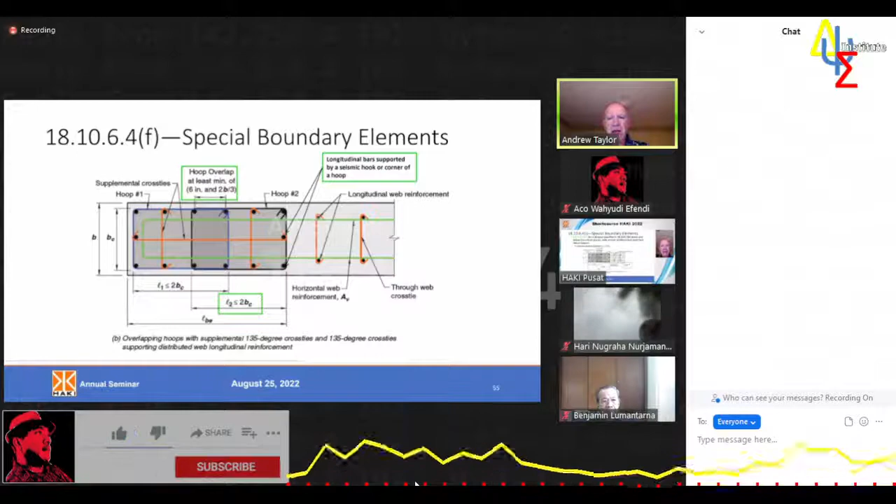Yeah, so I already described this — this is the orange bars on the right. So I've described all the changes there in reinforcement detailing for special structural walls.

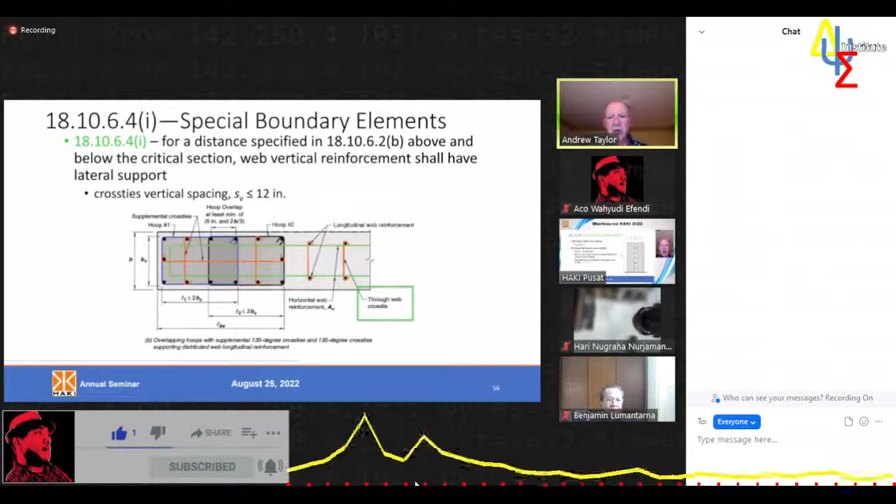They're a very common and popular type of shear wall that has never been officially defined. So we now have an official definition of a ductile coupled shear wall. It's given in the code in section 18.10.9, and it has to do with the height-to-length ratio of the wall being greater than 2, and with the provision of coupling beams and their length-to-height ratio as well.

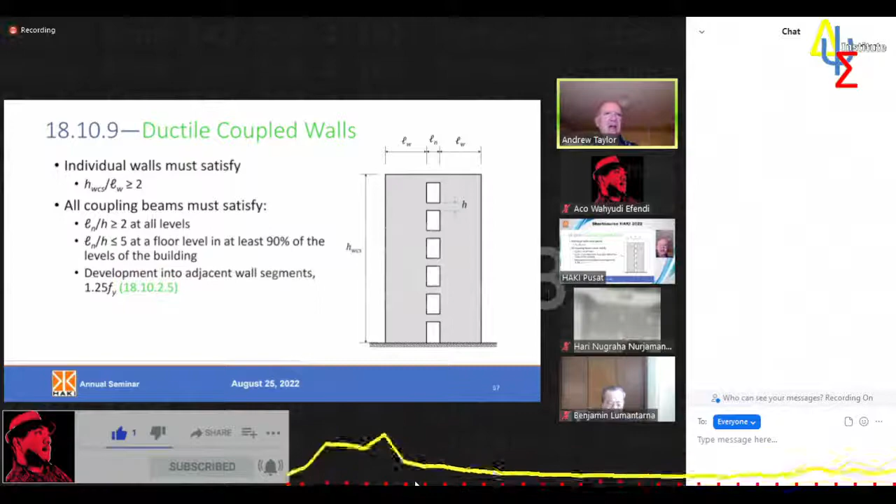Now, you may ask, why is it important that we define what a ductile coupled wall is? It's important because, at least in the US, when we design for seismic loads for each structural system — whether it's a steel moment frame, concrete shear wall, steel plate shear wall, whatever — there's a factor called R.